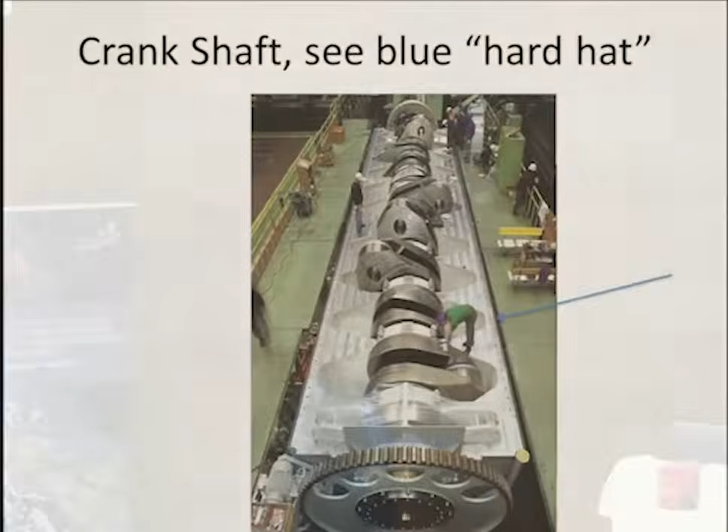And that's kind of the deal, why do you go to a gas turbine anyway? It's because ultimately the power density of a gas turbine is higher. And so this is a 200 megawatt turbine, and it's definitely smaller than the piece of iron. So it's definitely smaller than this thing right here. Which one costs less money? I don't know. I suspect this one, even though it's got a lot more iron, it's only iron. There's a lot of high-tech metals and stuff back in this part here.

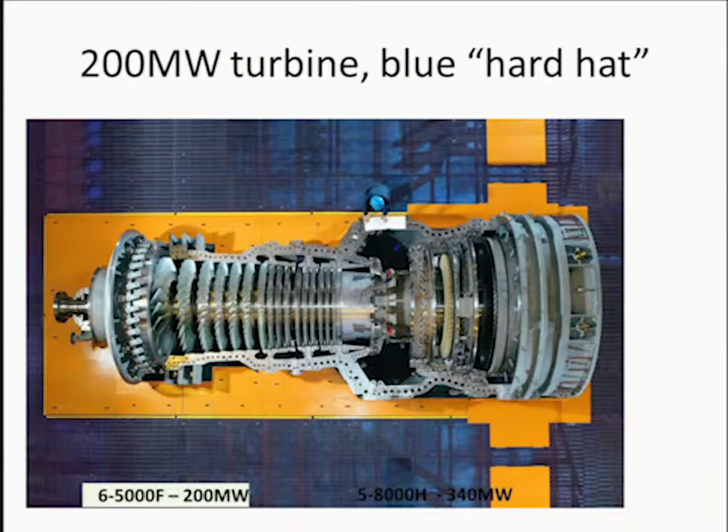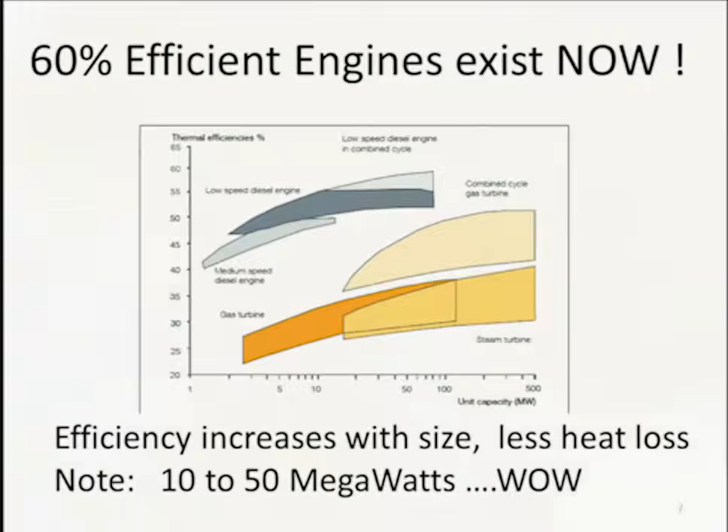We've seen some people saying engines are upwards of 60 some odd percent. Well, when you get to 50 to 100 and more megawatts, you can have efficiencies up in this area. Here we're showing gas turbines. Maybe this curve's a little bit low because the combined cycle, having both gas turbines and steam, will bump you up to like 61, which is what both Siemens and GE are now touting. So we say that you can get a 50 to 57% efficient diesel engine now, and we'll talk about that in a minute.

It turns out, why is that? Why do these big engines get better and better? It's because the heat losses go as d squared and the energy inside the piston is d cubed, so you get more and more approaching the adiabatic. And that's the primary reason that big engines are more efficient than small engines. Never mind that, okay?

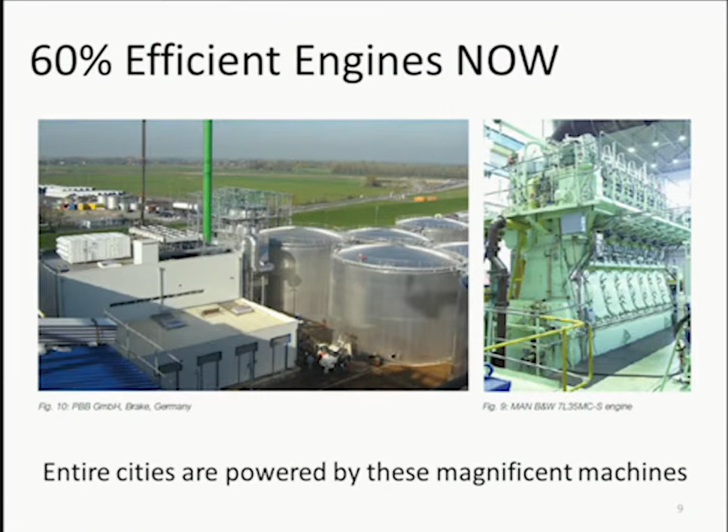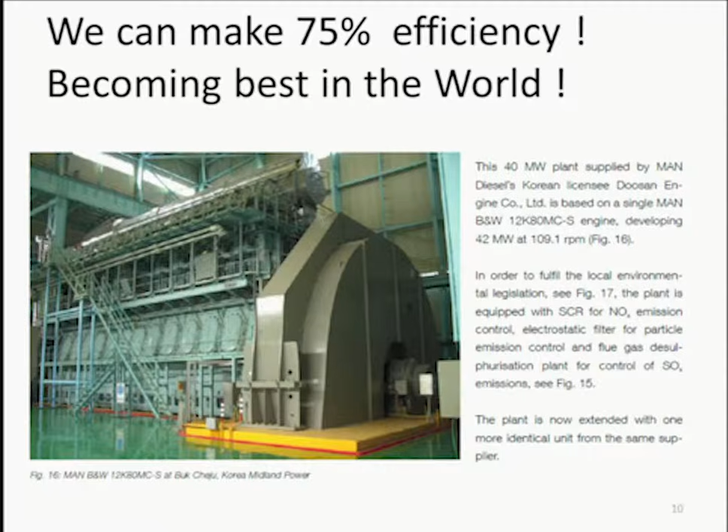There are many cities that power themselves on these kinds of piston engines. In particular, I've been to Costa Rica, and the city of San Jose, Costa Rica has 16 of these engines to make the lights of that part of Costa Rica. Here's just another example. And so we claim, you'll see why, that we're going to make a 75% efficient engine, okay? And we start out by saying we're going to swap the working fluid with argon.

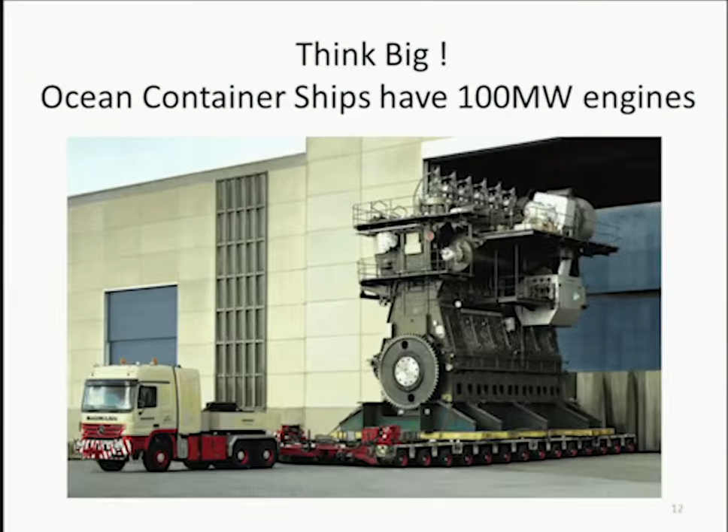There's our engine again. You're taught in thermodynamics about the Otto cycle, and it should be sort of an undergraduate exercise to derive this equation for the Otto cycle efficiency. It's compression ratio raised to the gamma minus 1. And sort of what started me on this is we see in the engine community, because of climate change, and not because of high price, fuel's cheap, because of climate change there's legislation that everyone's required to get less CO2, which means more efficient. So less CO2, more efficient, and so everything's being changed on an engine.

If you own an American V8, keep it. It'll be a collector's item. Engines are downsized. BMW has announced their 3-cylinder engine for their large car. It has 3 cylinders, 2 stacked turbochargers, and can boost to 4 bar. Naively, 4 bar times 3 cylinders means it's actually 12 cylinders when it is going to full power. So these are the various things people are doing. They're also going to 10-speed transmissions. That'll be routine on cars, if not already.

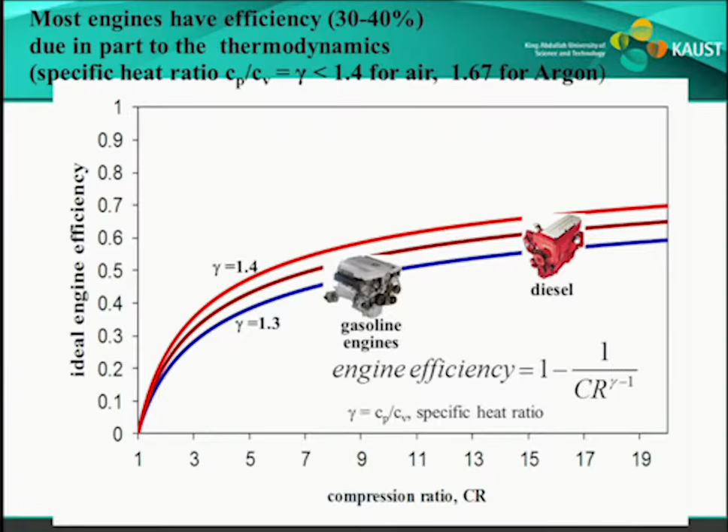So I said, well, look, if you're going to do all these things, tweaking engines, changing the valves, making Miller cycles, all these buzzwords, why don't you step back and let's talk about changing the basic thing that we consume, air. And instead, if we use argon, then we can jump from these curves to these curves for the same engine.

Even some people, you'll see a quote from a VP at a large engine company who said, yeah, that's a quantum jump. Really it is, okay?

So we're talking about switching to argon as a working fluid, and the easiest thing to think about is we'll start by burning hydrogen and oxygen. We'll talk about that, but this will grow. It'll take a few years, but we'll start talking about someday how you'd burn gasoline and still use argon as the working fluid. I don't have an answer to that right now, but I think it'll grow.

So this is the basis of the talk, is really, we're going to jump from here to there. We see that it does do wonderful things. That is, it'll increase your efficiency by a factor of this ratio, which is about 1.4. So if you take those engines that I showed you at the front end that are like 40%, well then I'm going to improve their efficiency by 1.4. And we have data already to prove that, okay?

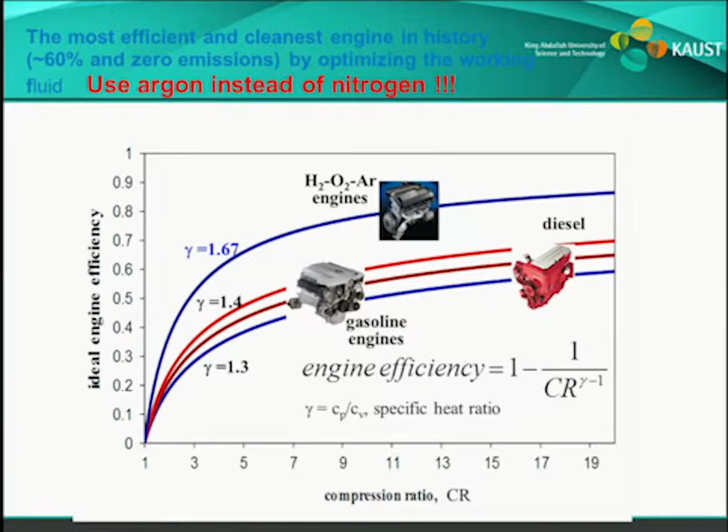So here we go. The first application that really started to get our imagination was the growing field of energy storage. And I didn't believe it, but it turns out the argon engine looks like a contender for storing excess energy. We'll see a little bit more of that.

Later we think, well, we think we could be on boats and maybe locomotives, you know, still pretty big. And of course, always electrical generation. We think, we could talk about maybe coal and natural gas. How would we work that in an argon cycle?

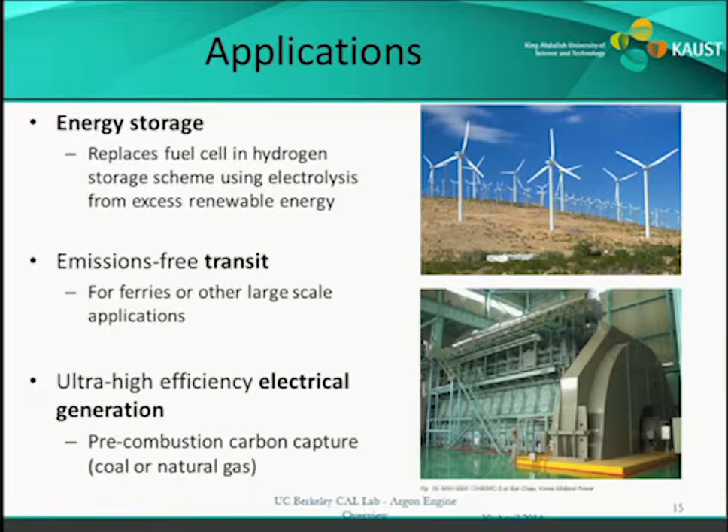Sidebar a little bit, there's something that's, again, energy storage is new, really didn't exist 10 years ago. So talk to venture capital people in the Bay Area. This is one of the most exciting areas in business now, the energy storage business.

Because we're committed to renewable energy, that being solar and wind and others, we are confronted with what somebody calls a duck curve, and I apologize that when it's in black and white, it looks like a duck. Here's the head, and then back here's the tail. But now that it's been colored and decorated, it doesn't quite look like a duck. But trust me, if somebody ever mentions the duck curve, this is what they're talking about: you have excess energy during the daytime, and you want to store it and divert it, excess in the daytime, and give it back at nighttime.

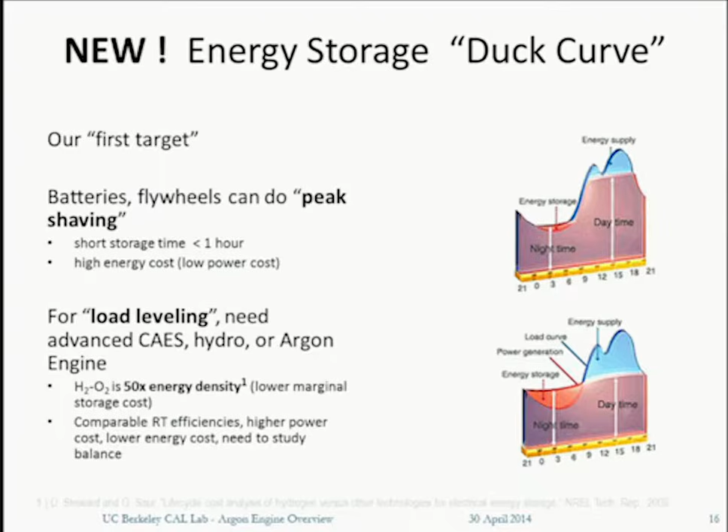I guess a special note right here. In Berkeley, there's a startup company that does compressed air storage, and they're contenders. But we had a discussion with them. They come to our conferences, and if you compress air, we say that you will need at least 50 times more tanks to store your air than I need to store hydrogen and oxygen. And so we laughed with the compressed air people, and they said, if tanks are expensive, I win. If tanks are cheap, maybe you win. And not only did they agree with me, but they finally confessed that they have kind of evolved, and they're in the tank manufacturing business. Okay, so I'm going to be one of their customers, all right? What an evolution out there.

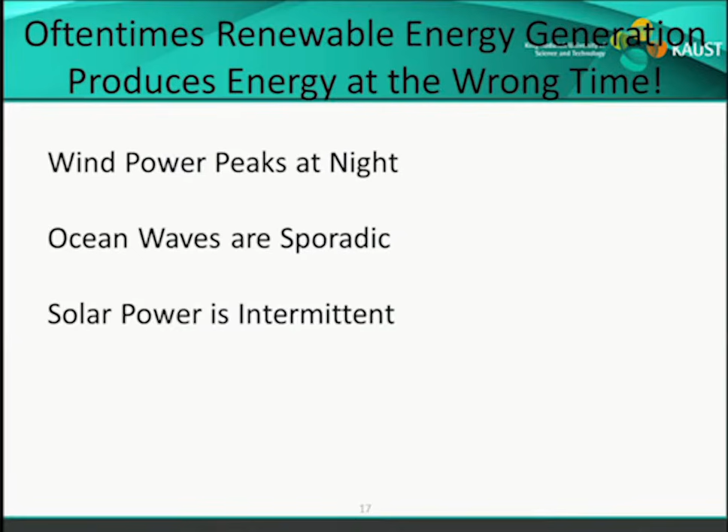Okay, so I guess I've already said this. Renewable energy, wind power peaks at night, didn't know that. Waves are sporadic, and solar power is intermittent. And I love my computer that can do that, right? So energy storage is the lucrative answer, and I said I'm going to form a company called Buy Low, Sell High, okay?

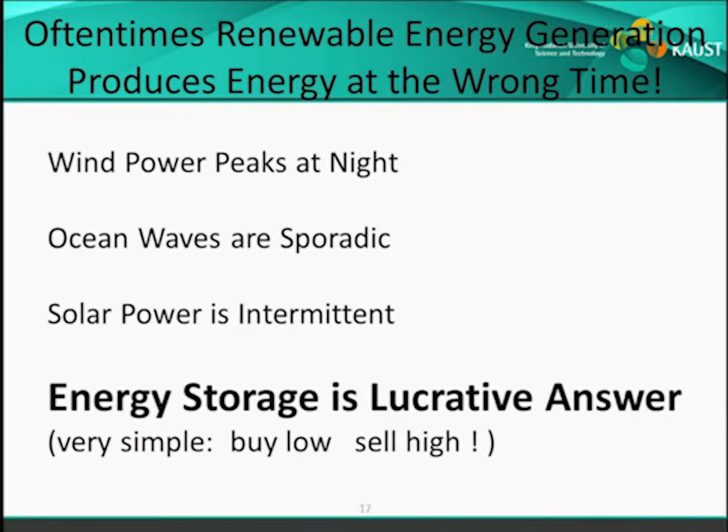So I guess I decided somewhere in the talk I'll give you an outline. Right now I'm talking about using the Argon power cycle for energy storage, and we'll keep going.

If you're going to store energy, I have colleagues at Berkeley working on flywheels. To my amazement, I thought a flywheel would spin up, stay there for 12 hours, and then you'd spin it down, but that doesn't happen. Actually, the characteristic time of a flywheel, try as you may, is typically less than an hour.

Water pump storage is unquestionably the best way to store energy. All you need is a large lake, say 1,000 meters above where you are. Here in Saudi Arabia, that's going to be difficult, and in fact in many parts of the world it's just not possible. Where it is possible, it's being done. So water pump storage is good, no question about it.

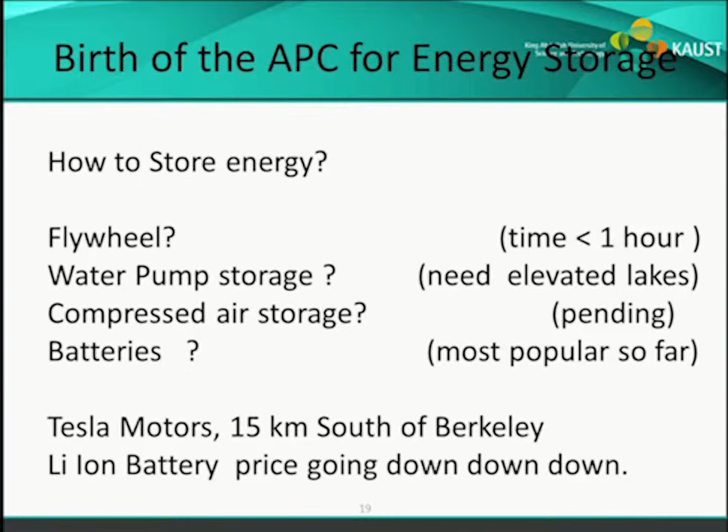Compressed air storage is pending, and batteries are most popular so far. Right down the street from us in Berkeley is Tesla Motors, and we know they're working very hard on getting the lithium-ion battery price down, down, down. They tell me they are my strongest competitors against the Argon cycle, so we'll see.

Well, you'll see my whipping boy here is the fuel cell. You've got to create a two-horse race, so it's me versus the fuel cell. I call them a fool cell—that's just my observation, okay?

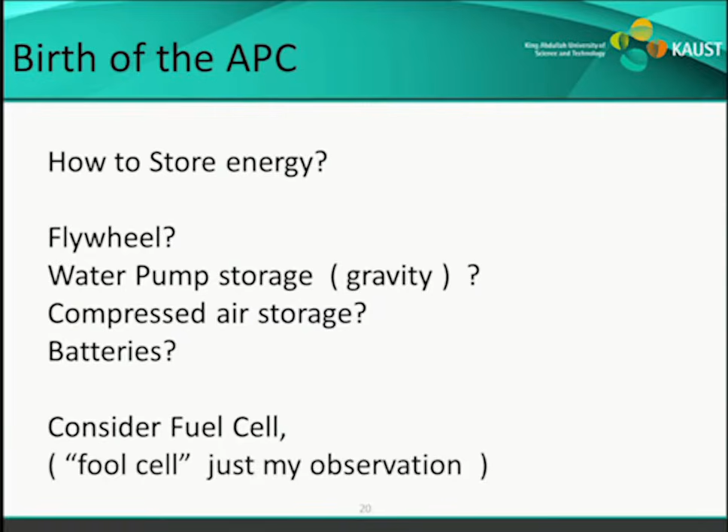So what am I going to say? We're going to have excess electricity, and you store that energy by generating hydrogen and oxygen. Later we're going to burn the hydrogen and oxygen in a fuel cell, or else you can come over to me and we're going to burn it in the Argon power cycle. And I argue, pretty clearly, that we're at least as efficient and it's far less complicated.

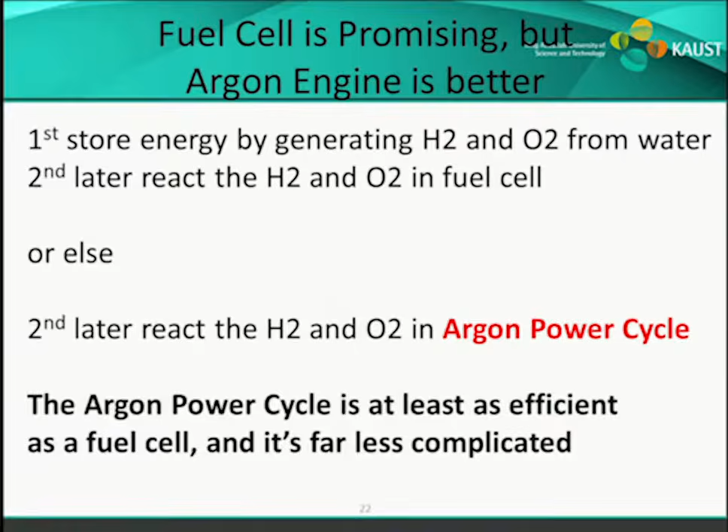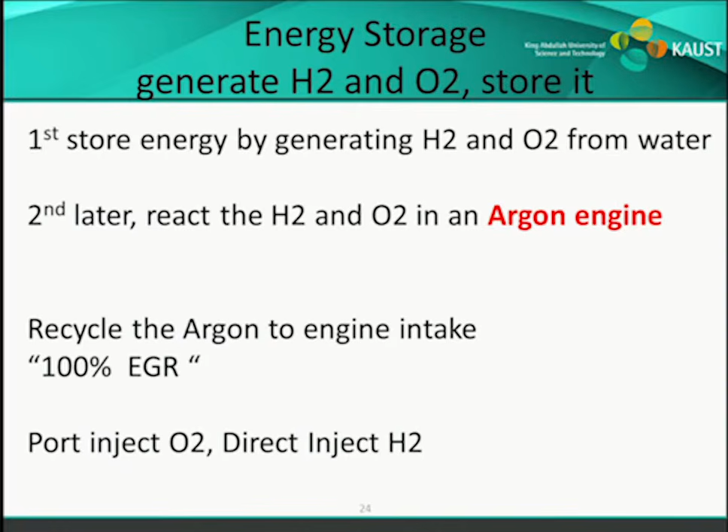What do I have to do? My exhaust only has water and argon. I remove the water by condensation, and then I just recycle the argon to the intake, as we've said before. A lot of people talk about EGR on their engines, and I laugh—this is 100% EGR, and that'll come up again in this talk.

That's kind of interesting—fuel cells are typically priced at $5,000 a kilowatt, and piston engines are less than $500 a kilowatt. So 100 megawatts of power will cost $500 million in fuel cells, or less than $50 million in this kind of hardware. And this is what we're talking about.

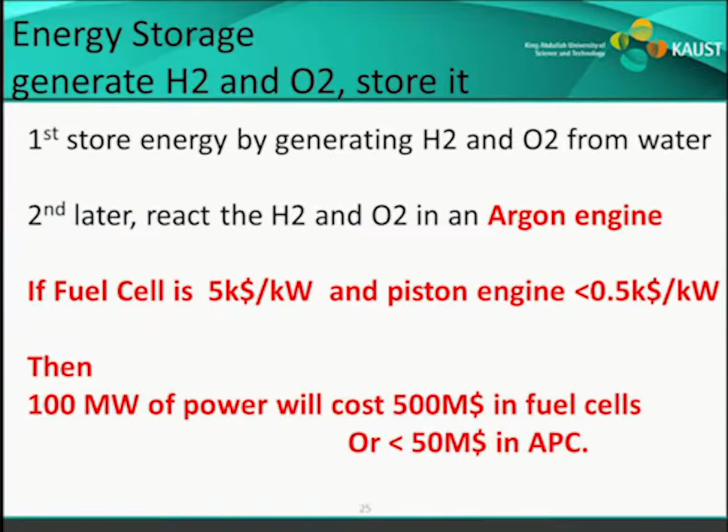By legislation, power companies in California, for sure, and elsewhere, are required to have about a third of their capacity in storage—that's required by law. So they are going to buy stuff, and the requirement is they start to place the order by the year 2020, with the idea it'll be installed by 2024. So everyone is scrambling, myself included, to be somewhere by 2020 where they would consider buying an Argon engine as opposed to batteries. So once again, I say it's simple.

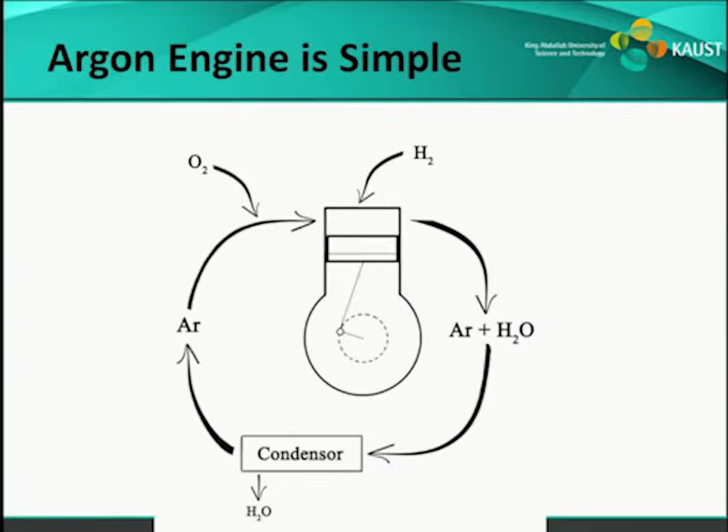Of course, it starts out that way. The devil is in the details, and we'll see that in time. Yep, okay, we've been there.

So I did some experiments early on with a spark-ignited engine at Berkeley, starting in 2009. The idea was we had the engine running on air and hydrogen for 5 minutes, a single-cylinder engine. Then we switched the input to pre-mixed oxygen in argon and port fuel injected hydrogen, spark, and we had a runtime of 10 seconds. Like the previous speaker, Farouk—I did my PhD on a shock tube, so I'm inclined to always do short burst experiments, and this is just one of those examples.

And so we did that, and I should have known what was going to happen—surprise, the engine knocks, okay? Why did the engine knock? Right out of the gate, the minute I switched on the argon, it started to clatter. It was a CFR engine, so it's designed to take knock, and it did.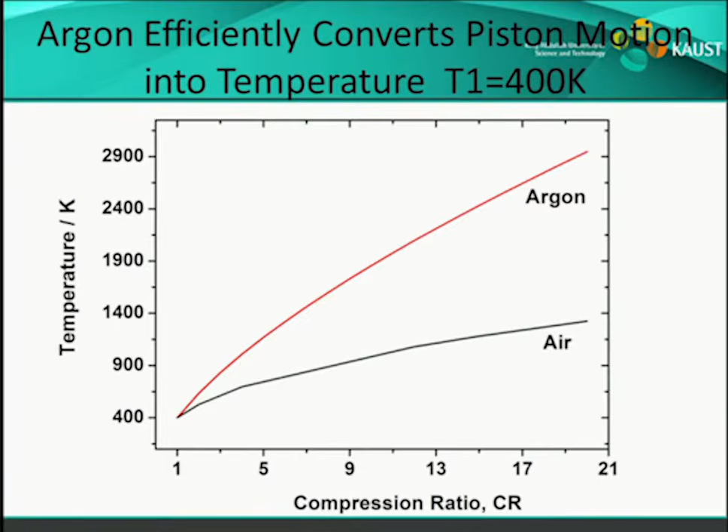Thanks to graduate student Tim Sonnet, here's a cartoon showing that triatomic molecules have several degrees of freedom, but argon itself only has translation. As the piston compresses the gas, it excites all these degrees of freedom in diatomics and triatomics, which absorbs a lot of energy. But argon doesn't have these degrees of freedom, so it can only absorb energy as translation, so it gets much hotter. On the same note, this is the most efficient extraction of work, when you work with a monatomic gas.

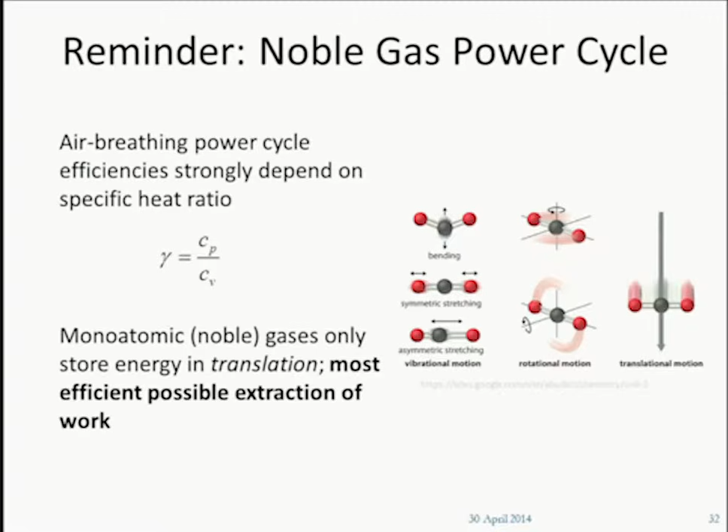Thanks to Tim. There it goes.

We also have software, not large eddy simulations or anything, but a much higher level. Software made by AVL called Boost models engines, and other widely popular software is called GT Power. These are kind of 1 or 0-dimensional models.

Here I'm compressing gases, and on this one I tried to get to the same starting temperature. Then if you add the same amount of fuel, the argon jumps up to a much higher temperature than air, for the same reason, it's monatomic. So when you deposit a certain amount of chemical energy into argon, it gets hotter than the comparable energy deposited into air.

Of course, all of us in combustion know immediately that this would normally produce more NOx. But there's no nitrogen in this system, so it doesn't produce more NOx.

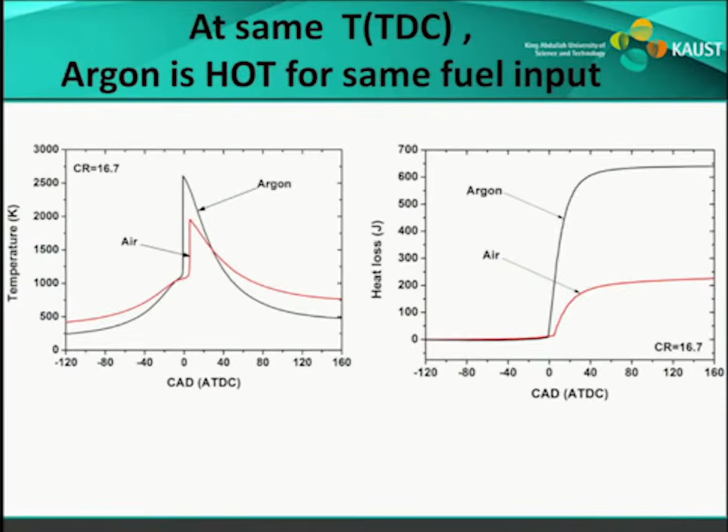But you worry, wait a minute, it's getting hot, so let's look at heat transfer. These codes do look at heat transfer, and yes, there is more heat transfer. So we worry about that and look at the main code here, which does the whole cycle.

Here it's showing the work as a function of crank angle, and indeed compressing argon requires more work, but then you get more work back out. This model includes the heat transfer, so although heat transfer is higher, we're still getting more efficiency out of the whole cycle.

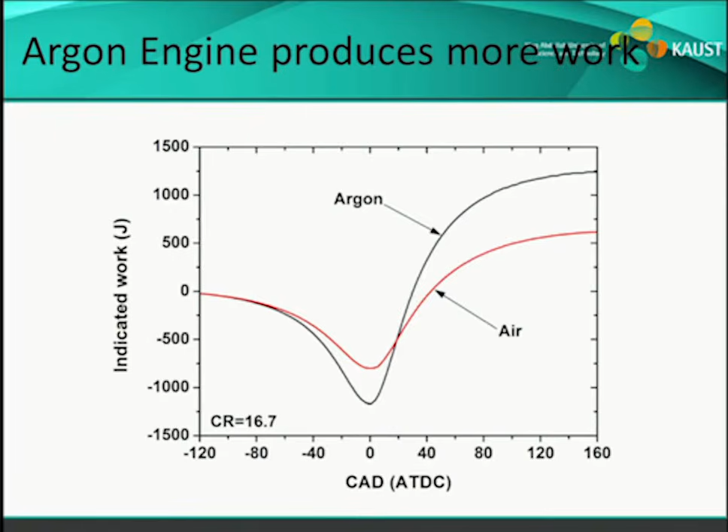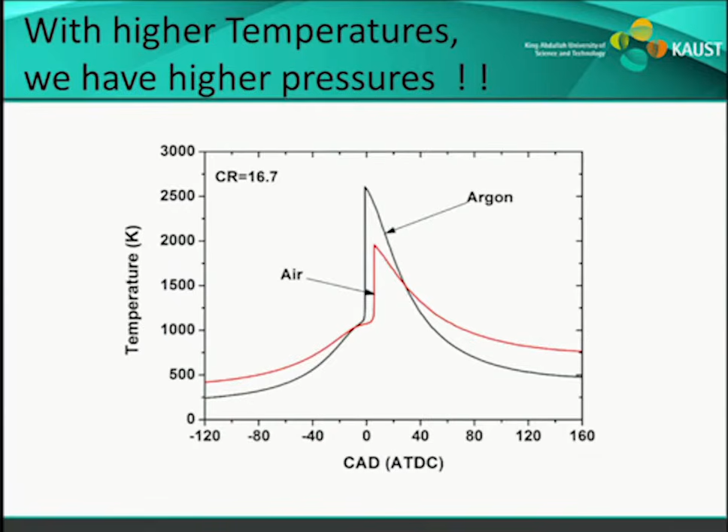One last comment: with higher temperatures we have higher pressures, and this ratio of temperatures suggests we will certainly be above 100 bar in this engine routinely. So this is a high pressure, high Reynolds workshop. Certainly we're going to be at high pressures. Let's see if we're going to be at high Reynolds number.

I think I told you earlier that as these engines get larger in diameter, here's a calculation: as we increase the bore diameter, we increasingly approach the adiabatic limit. So we're trying to operate around here for much of our research.

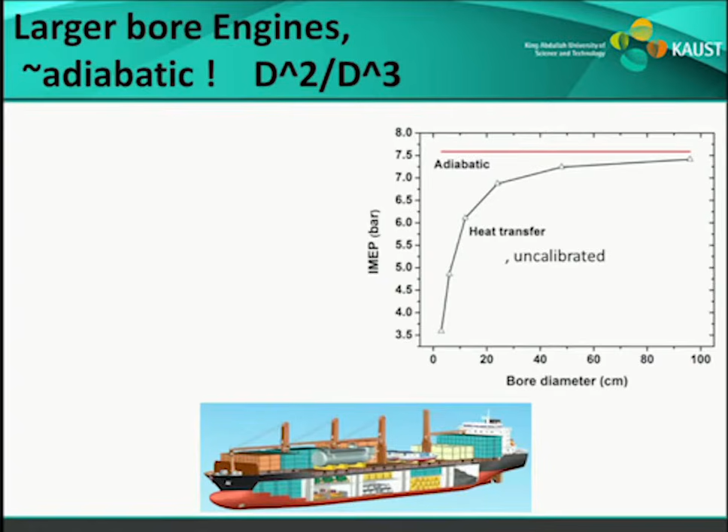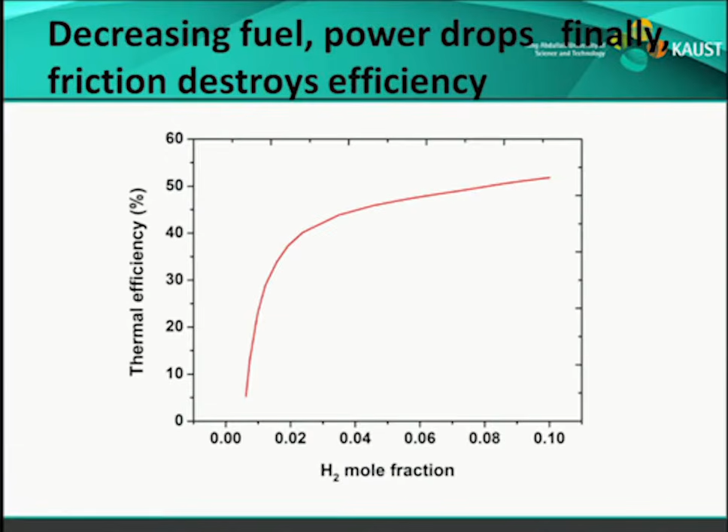Never mind that one. One last thing, these models are great. If you start throttling back, injecting less hydrogen, finally you get to the point where your efficiency drops tremendously, because you don't have enough power in the engine to overcome friction. I'm trying to show you that this model has lots of fidelity, including friction and many other things that happen inside an engine. So this is correct.

Okay, so I told you my SI engine was set back by knock. So we said we're going to convert to a diesel mode, from spark ignited to DI, direct injected. We suggested we would port fuel inject the hydrogen and direct inject a liquid, maybe oxygen, but just to get going we could use N2O or H2O2. So those are just options we're looking at now.

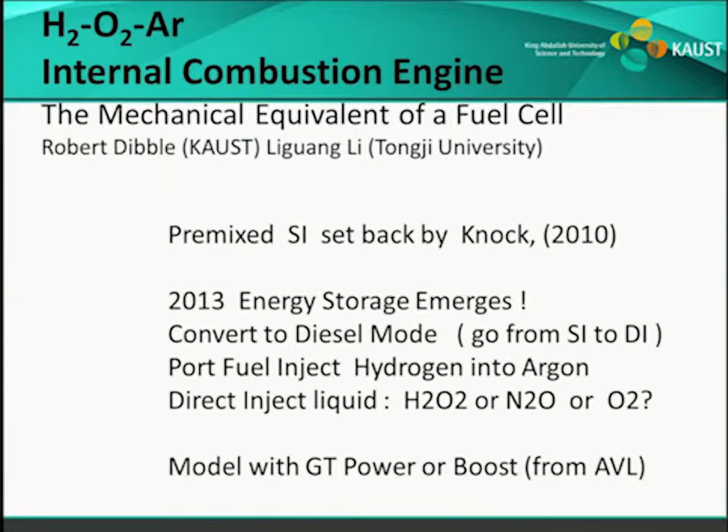We did have a meeting just before the, where was that at, the first meeting was August 2nd, the Saturday before the International Combustion Symposium in San Francisco. A lot of people were at that meeting, and I was eager to be there. What I wanted to come out of this meeting was, did we pass the laugh test? Is this a curiosity or is this a real idea? And we did pass the laugh test.

And see, I have a star. I don't know how to make that red, but I want it to be red because I've been teaching with China for five years, particularly at Tongji University. Tongji has embraced this cycle also, and we made a joint proposal to the China NSF and to the USA NSF, because they were encouraging a joint program between China and the United States. So that's pending. So an argon cycle working with China, Tongji University, and Berkeley, and then of course now going to be KAUST.

Here I do a calculation for you. I was astonished to find out that an electrolyzer that makes hydrogen and oxygen from water is only 75% efficient. And that's a fact. Siemens makes one now, 5 megawatts, and they're constructing a 10 megawatt unit. They think there's a growing market for these. So there's definitely a market for stored energy with electrolysis, and they confirmed that number's like 75%.

Fuel cells, when they're delivering power, are seldom more than 50% efficient. So the round trip efficiency is 37%. You put in 100 units of energy, and you get 37 units returned to you.

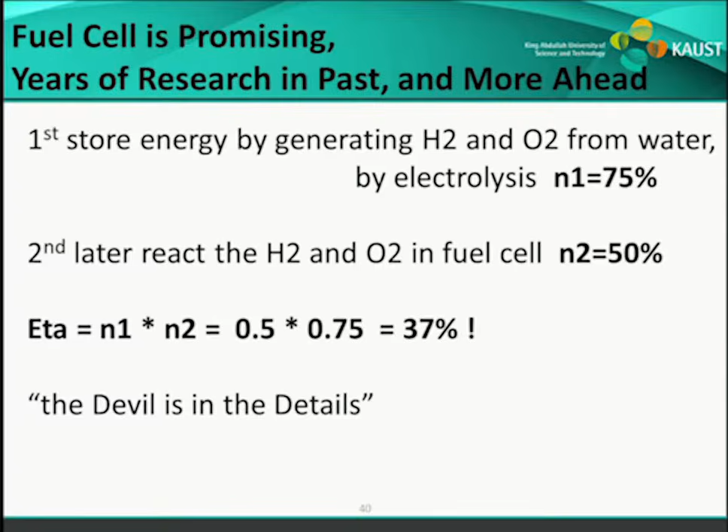On my side, because I'm 75% efficient for electrolysis times 75% for the engine, I get 50% for the round trip. I didn't think that was very good, but people in energy storage said that is good, and competitive, though not the very best. Batteries can be as high as 80% for this number, but they said those batteries will cost 10 times more than my system, and all these systems are going to cost on the order of $1 billion. So the difference between $1 billion and $10 billion is what's going to be on the table.

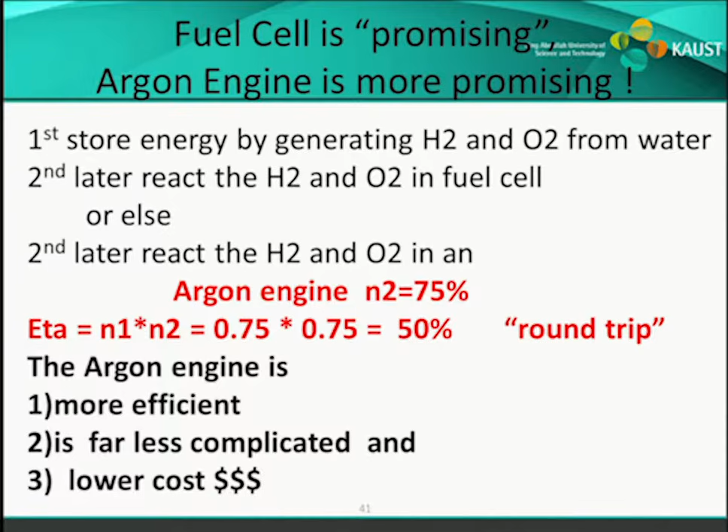So here I am selling you the Argon engine. It's more efficient, it's less complicated, and lower cost.

So, okay, this is just all metal, and you're all sitting there going, yeah, what's new, and why are we here? Remember, this is KAUST, and the T in KAUST is technology. Much of what's being done here is the science part of KAUST. I'd have to say I'm carrying the technology banner at KAUST. So I say it's not rocket science, or is it? And oh, it didn't bounce, okay.

We had a talk earlier this week, and I asked Benedict if she could loan me her slides, and this is what she did. She was showing hydrogen mixing with oxygen, and here she is at the critical point, right along that area, supercritical fluids. I'm not quite there because she was at, what, 150 Kelvin. I'm going to be up here at 300 Kelvin, so in a way, I won't need the Peng-Robinson equation. But because, as I was introduced, my PhD and undergraduate degree is in chemical engineering, I actually know what a Peng-Robinson equation is, okay? And I'll bet the rest of you don't, okay?

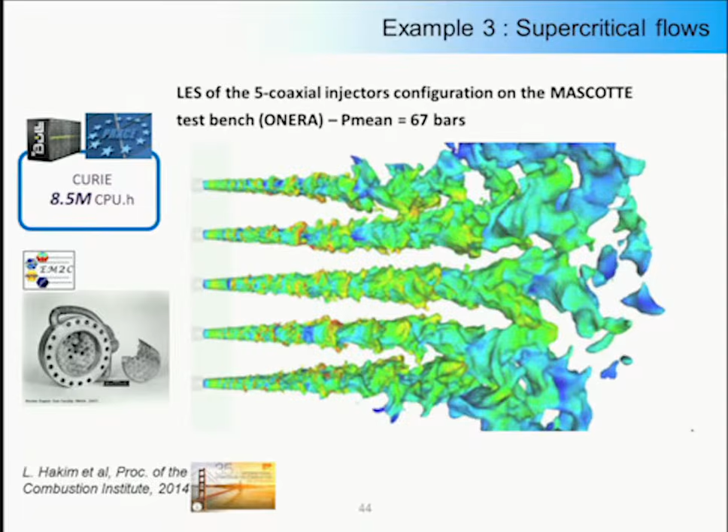So I'm going to move along here, and she had multiple jets. I might have to consider that too, because hydrogen's going to have trouble mixing into this Argon chamber. I talked to Professor Bassetti about this, and while I was talking, he Googled rocket motors, and he said rocket motors always have the oxygen in the center core and the hydrogen surrounding it, so end of story. So no doubt, when I do injection on this Argon engine, the oxygen should be in the center.

And here is really interesting what I wanted to show you all, and I was sitting on the edge of my chair as she presented her stuff. Here's hydrogen, and it looks like a lot's going on. It looks like it, but look at the oxygen. It's doing almost nothing. It is so massive compared to that, the oxygen is blowing in like that, and we've got nothing like the oxygen truly mixing.

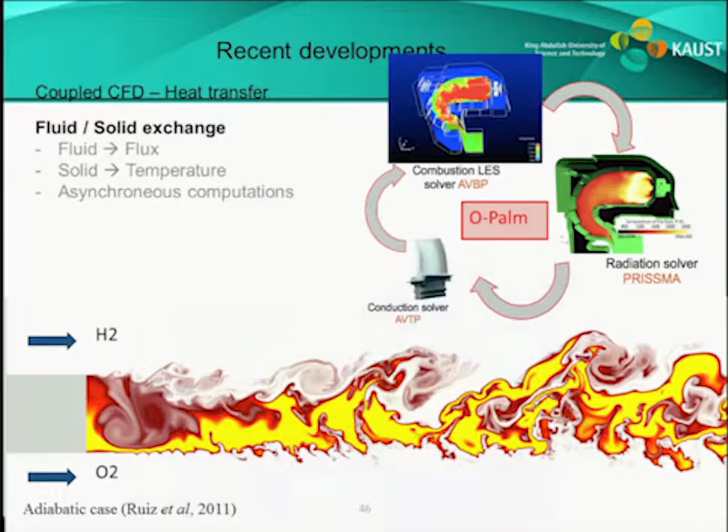So, well, more on that. She's got a close-up here. Once again, look at the oxygen down here. It's not doing much, really. We've got a lot of activity, maybe recirculation and things, hydrogen doing all kinds of things, but truly, there's not much going on. It's going to, I don't know what's going to happen, okay?

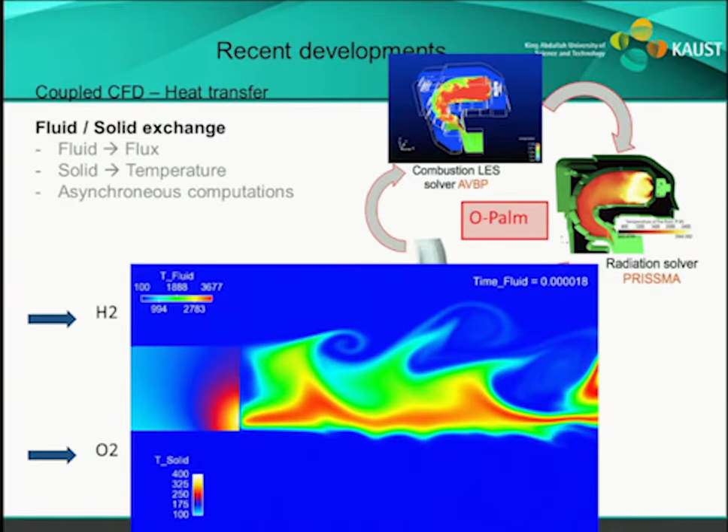So it turns out we are asking ARPA-E for $11 million. That's the size of this program. In the Bay Area, a venture capitalist will ask you, what keeps you awake at night? If you're asking for $11 million, they say, what keeps you awake at night? Well, what keeps me awake at night is the last pictures you saw.

So the mixing of hydrogen and oxygen into argon at 100 bar, I don't really know what that's going to look like. And trust me, everyone's vision of how fluid gets injected into another fluid is prejudiced by the fact that the fluid you're injecting is heavy, and typically it's liquid fuel.

This is a case where the fuel, the thing you're injecting, is very light. So it's going to be different. And of course, at 100 bar, it's going to be different times 100.

The other thing is, I don't worry so much about the engines themselves, but I have a requirement that I have to recycle the argon, and I need to remove all these things from the exhaust. That actually keeps me awake also. I don't think anyone here has to worry about that, but I have to, okay?

By the way, not everyone knows that argon is 1% of the air, and it's affordable. It's actually a byproduct of making liquid air. So don't worry, and also don't worry, as one person did, that I could possibly be so successful that I would tap the world's supply of argon. I wish, okay?

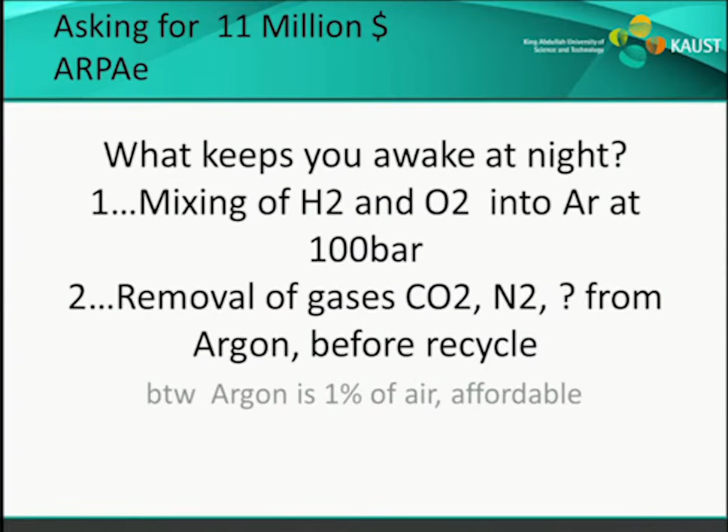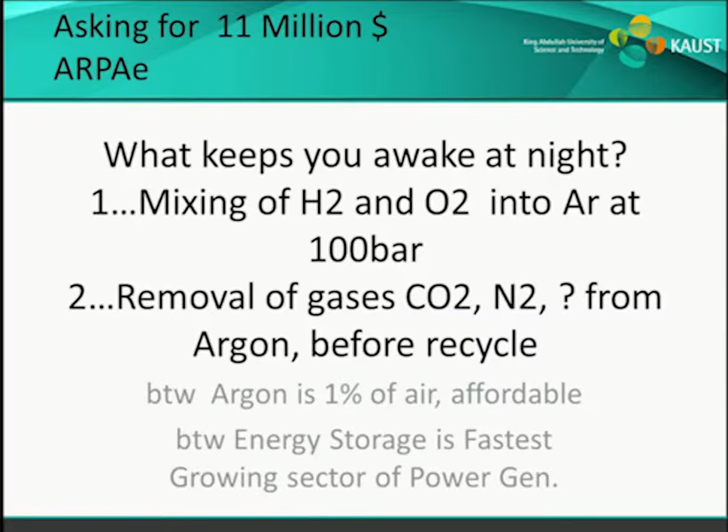I've told you, energy storage is the fastest growing sector of power gen, and in venture capital type things, they always want to charge into a growing market. They really never want to attack an existing market. Okay, we did that, okay.

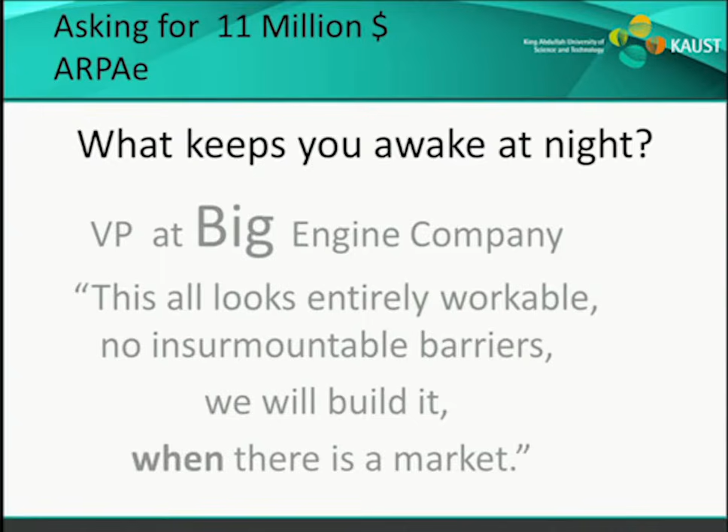The vice president of a big engine company told me this stuff right here. He says, this all looks entirely workable. There are no insurmountable barriers. We will build it when there's a market. So he just says, when it's time, we'll build this thing. And so the good news is, it's coming.

Part 2 of my talk is, I just discovered that there's interest in the argon power cycle for enhanced oil recovery. We generate hydrogen from reforming. Kalghatgi had to leave, but his pet term is, over at the Aramco side, the refinery has many homeless hydrocarbons -- hydrocarbons that they don't know what to do with.

And so one thing that you would do with the homeless hydrocarbons, which actually includes methane, is you'd reform it to make hydrogen, and then the CO2 we're going to pump down hole to recover, enhanced oil recovery, and we're going to have to get oxygen from an air separation unit or distillation. I was advised last night that right there will cost me 15% of my efficiency.

But be that as it may, that's all good because this looks interesting. As I said, the vice president told me we'll build it when we have a market. Well, now I think we have a market.

So we're back to this engine again. Now it's going to get modified so that the oxygen is going to come from an air separation unit or distillation, which also makes argon as a byproduct. That's a deal. Hydrogen from a reformer. And then we're going to compress the CO2 for enhanced oil recovery. It seems like this goes like that.

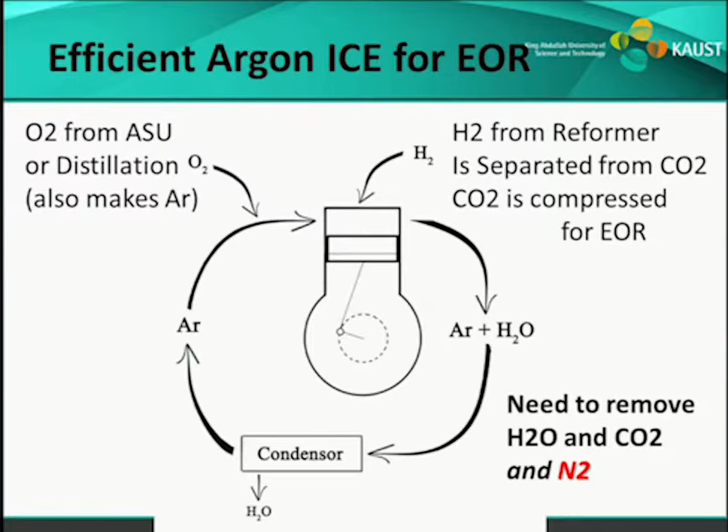And then I have to remove not only water, but I've got to remove CO2 down in this part right here, and nitrogen. That keeps me awake at night because nitrogen and argon are very similar looking molecules. So separating nitrogen from argon, I don't know how to do that.

Last is another cycle variant, and this one here is radical for me because there's no argon at all. So I'm abandoning the argon and just looking at -- and this is not radically new, but nonetheless, I was asked to consider this by the previous customer -- we have worked on this, Professor Chen at Berkeley computed that with 30% oxygen and 55% CO2 with 15% methane, the laminar flame speed of this mixture is the same as stoichiometric methane in air. So we have to go to that much oxygen to get this thing to have the same flame speed.

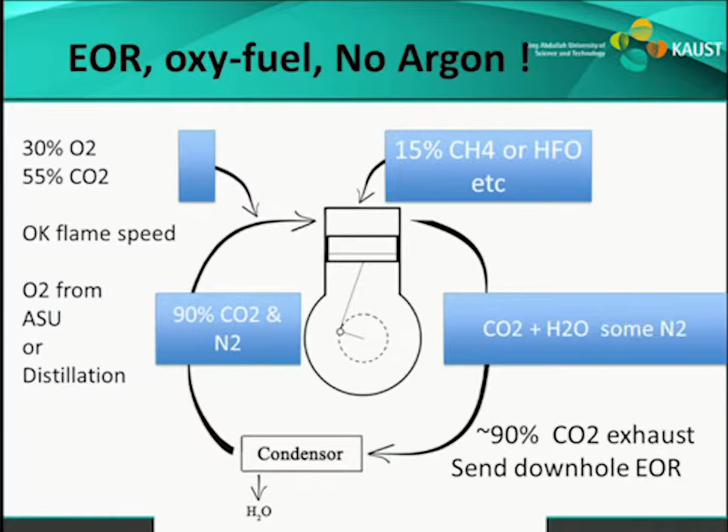So then we're going to take the CO2 and divert it from this exhaust. Some of it's recycled, something like this, and the rest of it is going to be for enhanced oil recovery, okay? So 90% of the exhaust is going to be CO2, and that 90% CO2 exhaust will be sent downhole for enhanced oil recovery. So that's the main three things I'm working on, but I was asked, please consider gas turbine.

And I've always told people, gas turbine's more trouble to me because I worry about the efficiency of compressing through all those blades that were designed for air. How will it work for argon? I don't have these problems with a piston engine.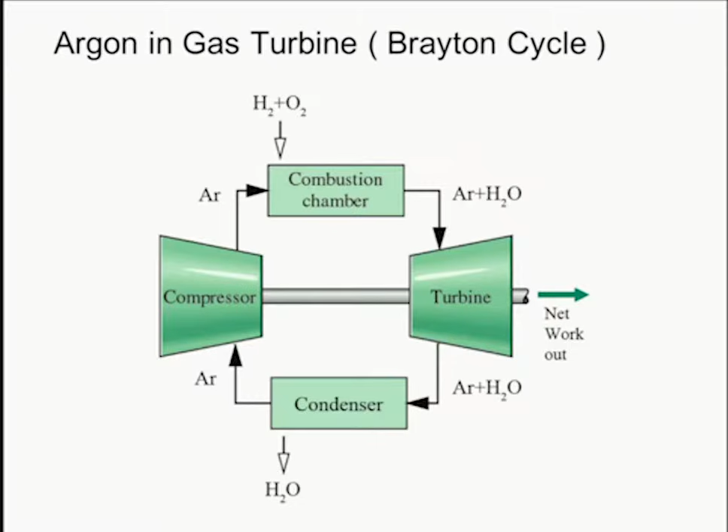The similar arguments apply. When you put in argon, you jump from these curves to these curves. The equation here is slightly different, and so the bump up factor for the piston engine is a pretty steady 1.4. Here it's 1.2 to 1.5 depending where you are. And if you're way out here, the bump up is more like 1.3 or something.

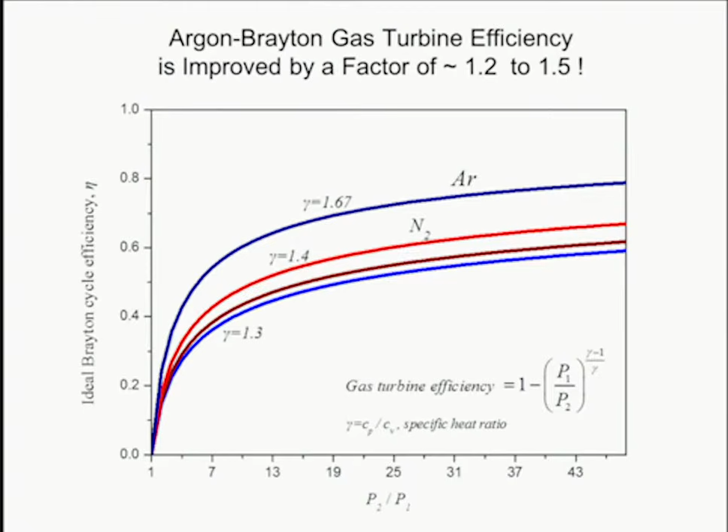Let's see what I say. They're called Brayton cycles. Brayton wrote his patent before there were turbines. And so Brayton's patent back in the 1800s is all about piston engines. So he had piston engines for compressors, then he took it off the machine, had a combustion chamber, then back onto a piston machine for the expansion.

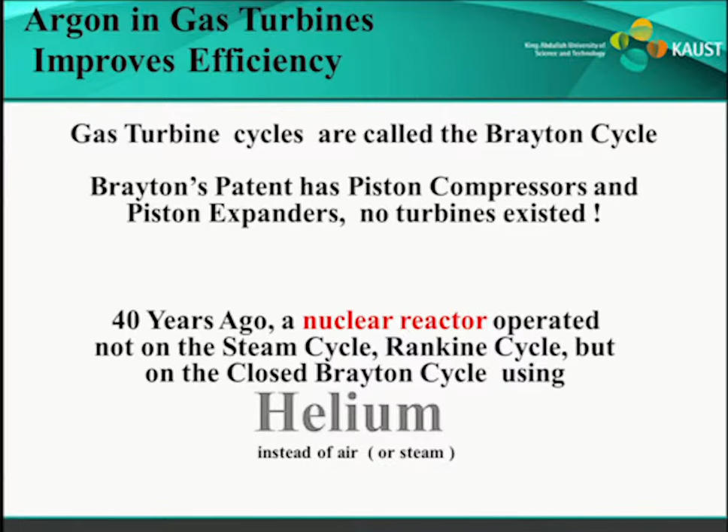Turbines didn't exist. Anyway, 40 years ago, a nuclear reactor operated in Colorado, not on a steam cycle, or a Rankine cycle, but instead on a closed Brayton cycle, and it used, where's my stuff here? Helium. And so that's good enough, but I'm using argon, and I thought, why would you use helium and not argon? And you might think better heat transfer, but we don't want heat transfer, so maybe we better have argon.

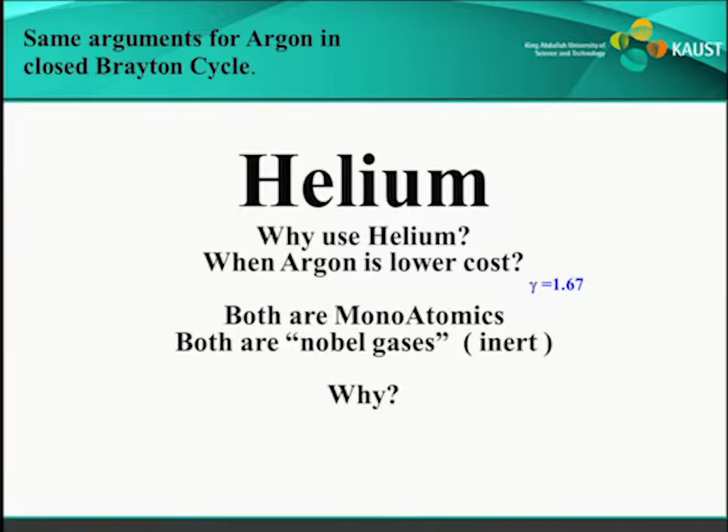And I checked why, and I had to ask around quite a bit, and finally I got the answer. It's here. The argon became radioactive inside of the nuclear reactor. So argon weighs 40. It has a substantial nucleus, and it would absorb. It became radioactive. That's all I could say.

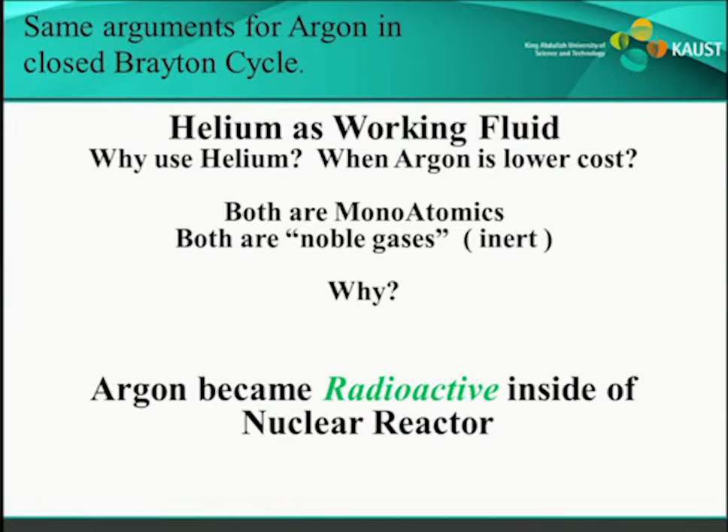Okay. So now, I think I told you that you can get this kind of power in a lot smaller package with a gas turbine. Okay, and we had these pictures before. So here I am talking about work in progress. Will a gas turbine designed for air 29 be okay with argon 40? And the short answer from an expert is no problem.

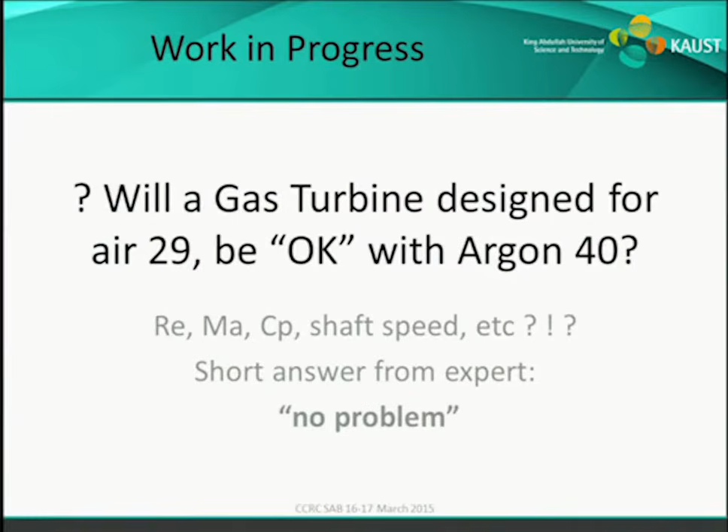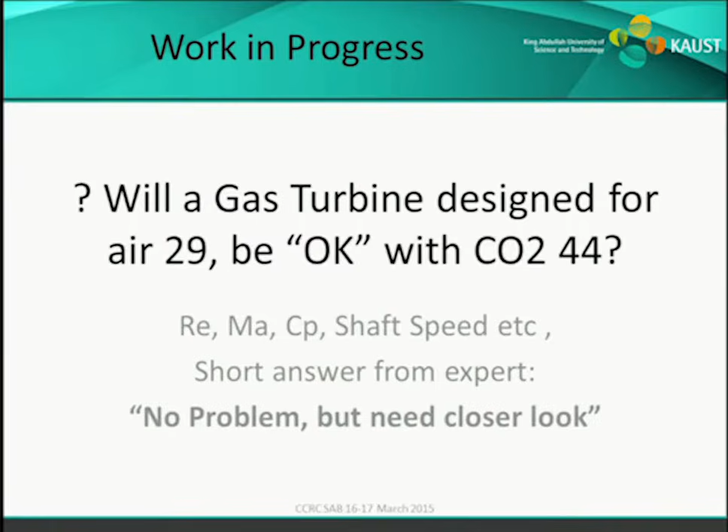And he went through 8 different steps, and I'm sparing you that. But he said it'll be 10% higher here, 10% lower there, 5%, 12%, and so on. And he said when you add it all up, it looks like it's going to be okay. We need to dig into that a lot more carefully. I asked him the same thing about CO2, and he was more hesitant. He said, no problem, but really need a closer look.

Okay, so we're getting close to the end here. A special note, I was excited when, in the Q&A, a banker raised his hand, a banker who has invested in batteries for energy storage, and his company is called Megawatt Storage Farms. Nice name, okay. He said, when the storage of hydrogen and oxygen is exhausted, the argon power cycle can rapidly evolve into an air-breathing engine burning natural gas or other emergency fuels such as dimethyl ether, liquefied petroleum gases, or methanol.

He said that's really the most important feature of your device, which I hadn't even thought of: even after you've exhausted the storage, you do not have a non-performing asset, which is a hard word for a banker. Okay, this is really important to a banker. So this device was well appreciated by the banker for this reason, that it continues to work.

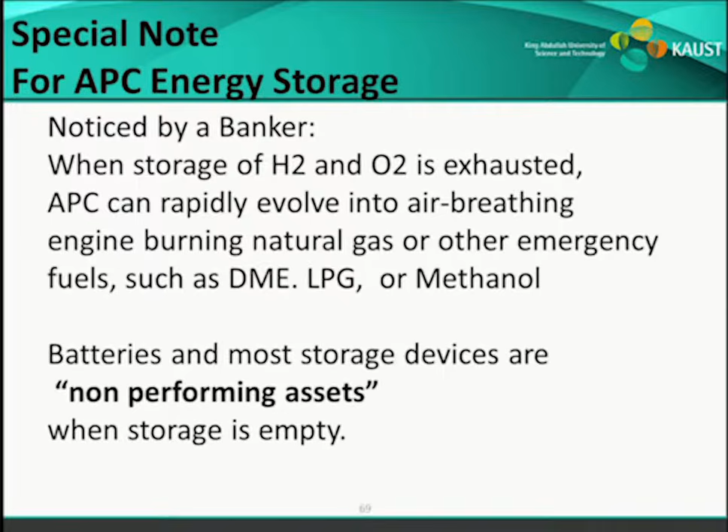Now this is kind of interesting for everybody. You're in combustion. For every engine in this talk, there is no exhaust at all. And so now we have arrived at a time in the history of combustion where we've tolerated smoke in the 1800s. In fact, it was a sign of prosperity, a big smokestack. The village was doing good.

We're making money. Then we quit doing the smoke, and by say 1960, we could see that the automobile was polluting our air. So we started seriously with, say, the three-way catalyst and other measures to clear the air, certainly by 1975. And I think we are heading towards an era where there will be no exhaust, which is hard to grasp, isn't it? The first time you heard about climate change, you probably said, I don't believe it. So this is the first time you heard about engines that have no exhaust at all. And I think we're headed there.